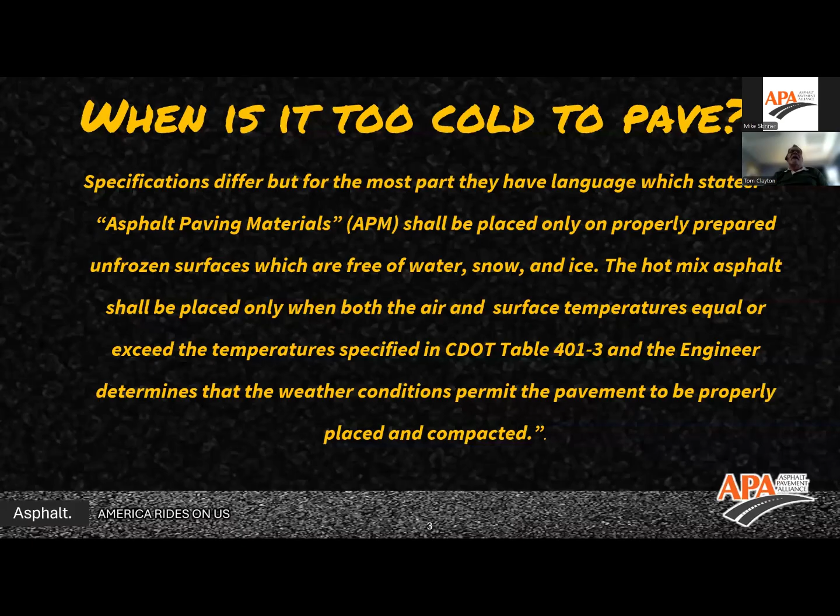Well, those things are definite that we have to have. We know that when we're placing on materials that are not within what we expect, having the proper temperature of the ground, proper temperature of the materials, we could end up with problems that won't show up the first year or second year, but will show up at some point down the line. So we want to make sure we're doing things properly so we can get the material down, get it compacted, and give us that long-lasting pavement that will get years and years of life out of.

So, as Mike said, the temperature is starting to drop. We're seeing people starting to get into a little bit of a panic mode. We had, in the Denver metro area, our first freeze warning overnight. It didn't get real cold, it got down to, I think, 30. So it wasn't a real big deal, but our ground in the metro area is still very warm.

It's probably in the 55 to 60 degree range because we've had a very mild fall. In other parts of the country, I was speaking to our newest employee who is coming to us from Minnesota. He told me about some really cold temperatures they have in mid-state Minnesota and up north toward the Canadian border. So they're already panicking up there.

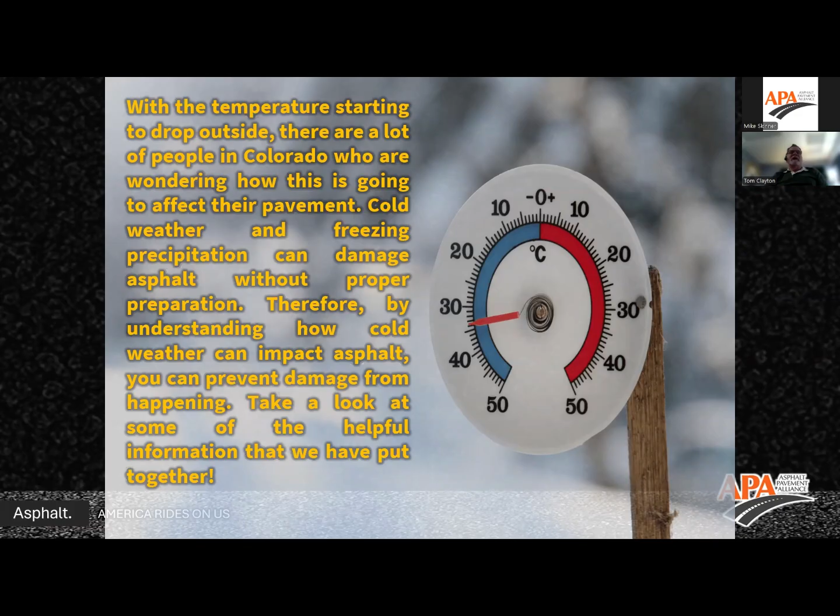So those are things we want to make sure we're looking at. Cold weather, we have to prepare for it. We know it's coming in our climates where we do get the colder weather in the northern half of the United States. We know we have to prepare for it and do the right things. So we're going to talk about some of these things and push through them. And as I go along, if you have questions, pop them into the chat window and we can chat about them as we go along or after.

So what are the considerations for paving in cold temperatures? Well, you can see I've got 3 bullet pointed items there: the ambient and surface temperatures, and then the temperature of the materials being produced. So it's important that we look at all of those.

One of the things I like to do when talking to people about this is I want people to rank those 3 things in importance as we're going along. So as all of you are sitting here looking at this, in your mind or write down, what is the most important? The ambient, surface, or the material being produced? What are the most important temperatures? What's number 2 and what's number 3?

So in my mind, number 1 is the surface temperature. If we have a good surface temperature, like here in the Denver area and the Metro Front Range, where we haven't had really cold temperatures yet, even though we had a very cold overnight and our ambient temperature today is in the mid 40s to upper 40s, there's no reason a contractor shouldn't be able to go out and put down asphalt and do it properly without having problems.

So that surface temperature, if it's too low, starts drawing the heat out of the mat, and the mat compacts. We all know the mat compacts from the bottom up, not from the top down. So it pulls the heat out of the mat, which sets the binder very quickly. So the bottom part of the mat, depending on how cold it is, will affect how much of that binder actually sets so that it will not compact.

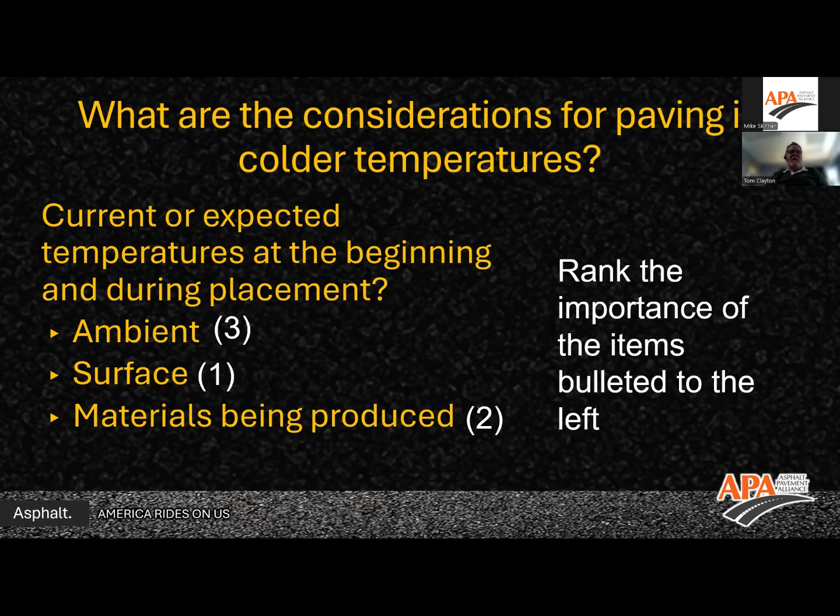In my mind, I told the contractor at that point, you should have just put it down, got your thermometer out, and said look, my thermometer says it's 40 to 42 degrees, whatever it is, we're going, get out of my way. Then prove to them through the process of placement and compaction that you were able to do what you need to do, especially since you had plenty of ground temperature to do it. So those are things we've got to be looking at on a regular basis.

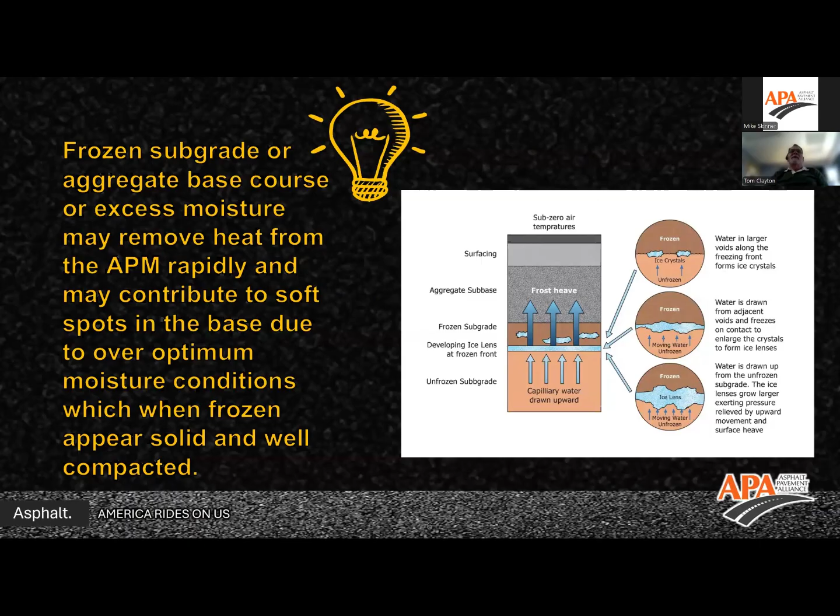So we know that a frozen subgrade base, even doing a top lift on a cold or very cold frozen surface, is going to be a problem. I talked about how it will rapidly pull the heat out of the mat, and it's not a slow process, it will rapidly pull it out. The heat transfer will go from the material being placed into the subgrade base or the existing asphalt layer, and it will draw it out very quickly.

And that will then cool the mat for the compaction process. For compaction purposes, it will deteriorate the life of the mat through those additional years of freeze-thaw. We have to be very careful of how we look at that and what we're going to do.

The thing about a frozen subgrade or frozen base course is you'll drive trucks over it, drive heavy pieces of equipment over it, and it will look very stable and solid, but it may have a high moisture content. When that hot asphalt, 300 degree, 275 degree asphalt gets on it, it will thaw that subgrade very quickly and could turn what would appear to be a very stable base into a very swampy base very quickly, with that heat being drawn out and thawing it down.

Think about an ice cube. An ice cube, when it comes out of the freezer, is very hard, very stiff, but if we leave it sitting out, it becomes a puddle. If we have subgrade that has a high moisture content, or it may have snowed or rained on it and then froze, it looks very good. We have to be very careful about what that is, and make sure we don't have that.

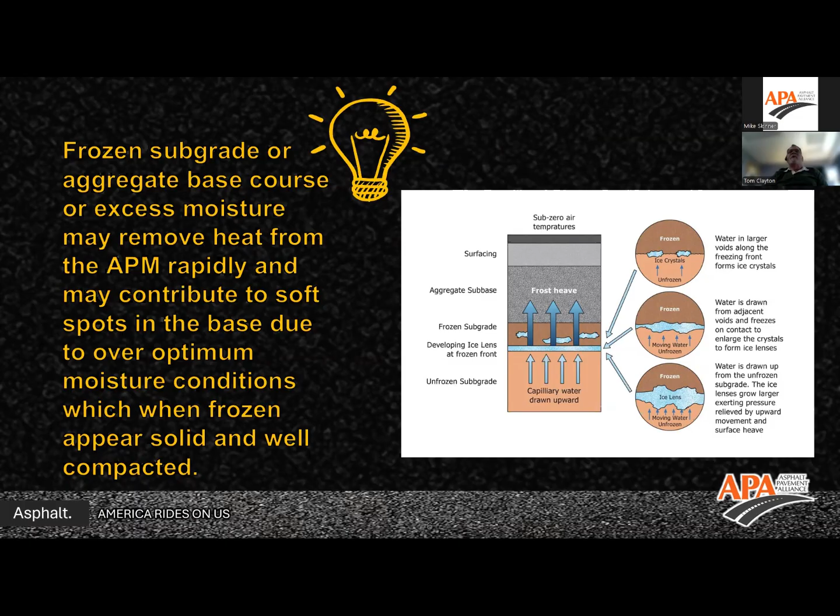How do we check for frost in subgrade? Well, it's not as simple as taking a thermometer. Most of us are using non-contact type thermometers, like an infrared thermometer, taking a shot at the surface and going, oh, it's frozen. That's great, it's going to give you information, but that's not the information you want.

You want to get somebody out there that's going to dig a hole down and try to figure out how deep that frost has penetrated. If there's frost and it's an eighth of an inch, a half an inch, even up to three quarters of an inch of frost, that typically isn't going to be a real detriment to the placement of the asphalt. If you get much deeper than that, an inch or more, you're starting to get into the territory of: wait a minute, we probably ought to rethink what we're doing here and get that frost to come out of the ground.

A little bit of frost on the surface - that's why it's important that the technician on site gets a shovel out and digs down to try and determine the depth of the frost, not just whether it's there. It's very simple to prove that it's there, but now we want to see, okay, it's there, but how much is there?

If it's a minor amount, like this morning here in the Denver metro area with our freeze overnight, we probably had a little bit of frost in the ground, but it was so minor that there was no reason why a contractor couldn't have gotten out this morning and started paving as soon as the sun came up, because we had such a minimal amount of frost overnight. So it's important that we look at that. The other things that are going to be drivers are the current ambient temperature and the wind speed. Wind and cold air will help to create additional frost.

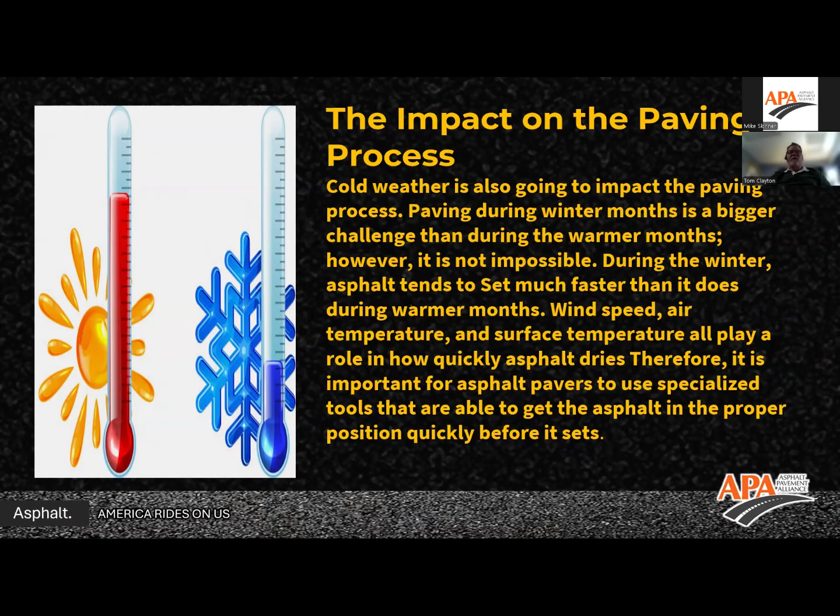So it's very important that in those months we are not just making assumptions, that we make true determinations, and that when we're getting the material down, we know exactly what we're putting it on.

I talked about this a second ago: paving over an existing paved surface. The problem with paving over an existing paved surface is that you have to tack. We put the tack down.

It's somewhere between 160 and 175 degrees coming out of the back of the tack wagon. We spray that down, put it on a cold surface, and it's going to be a heck for it to dehydrate or to break. The process of breaking tack is a dehydration process, the water coming out of it.

It's an emulsified asphalt that has been thinned or cut with water so it can be sprayed out of the tack wagon or tack truck. So we want to make sure that we get that tack to break. Not only does it break, but we want to make sure that it will set as well.

So the first step is to spray it and place it. The second step is for it to break. The third step is for it to set. We can all work on getting an image of that difference between breaking and setting.

Those of us that have been on projects, looking at projects, say once it's broken, okay, it's good to go ahead and pave. We start backing trucks and backing the paver in, and they're picking the tack up because it hasn't completely set. So we want to make sure the tack will set on that cold layer, that cold asphalt or concrete layer you're going to be paving over.

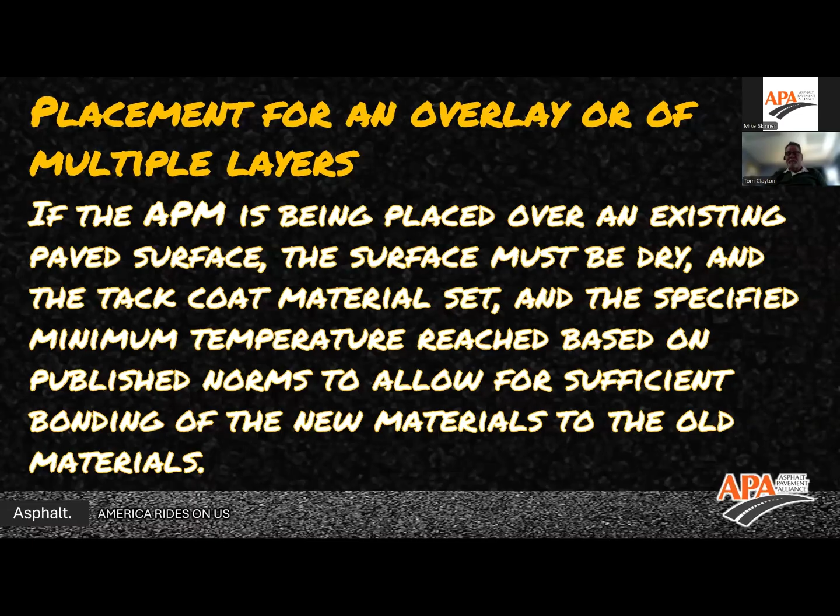You want to make sure that will also set, not just break, but set, so we can get that good bond of materials, the new layer to the old layer.

How do we get the material from the plant to the paver without losing tons of heat out of the material? Well, we know we have to tarp our loads because it's mandatory by law in most states, so that product and particles don't fly out of the back of the truck and hit people, windshields and vehicles following too closely to the delivery trucks.

So we've looked at it, and research has shown us that tarping has very little effect on maintaining the temperature in a truck. Tarps are not, in most cases, insulated. The bed of the truck is not insulated either.

Therefore, we have to do things to help get that material from the plant to the paver and hold and maintain as much heat as possible. So when they put that tarp on it and start driving, it's going to rapidly cool the top layer of that asphalt, so it will seal it up.

That's a problem because now we've got temperature segregation in our material that we have to think about. When it cools that top layer, it seals up the loose voids in the material, and the rest of the material sitting in there acts like a convection oven. We get an oven effect.

Once we get out to the site, we want to make sure we're not getting that temperature segregation in our material. It's important that the cold crust of material be blended back into the hotter material so we get a consistent temperature in that haul truck, whether it be a tandem, super tandem, a trailer, a dump trailer, a flowboy type, conveyor unloader, or a belly dump. We want to reblend that material so we don't have a hot layer and a cold layer, or a hot zone and a cold zone running through it.

So it's important that the trucks be unloaded properly. The best way to unload the trucks is to break the load prior to releasing the load.

What I mean by that is if it's a dump type truck, whether it's a tandem, a super tandem, or a dump trailer, they raise the bed of the truck up without releasing the tailgate. That breaks that load loose, and then it starts that movement again to start regenerating or remixing the material back together. Then they lower the bed of the truck back down.

The truck is then picked up by the paver. The paver runs into the truck, picks the truck up, the bed comes back up, but during this whole time the tailgate is still locked. So the bed is up and the material slides against the tailgate of the truck. Then they get the signal to release the material, and it slides out of the back of the truck into the hopper of the paver in a gob.

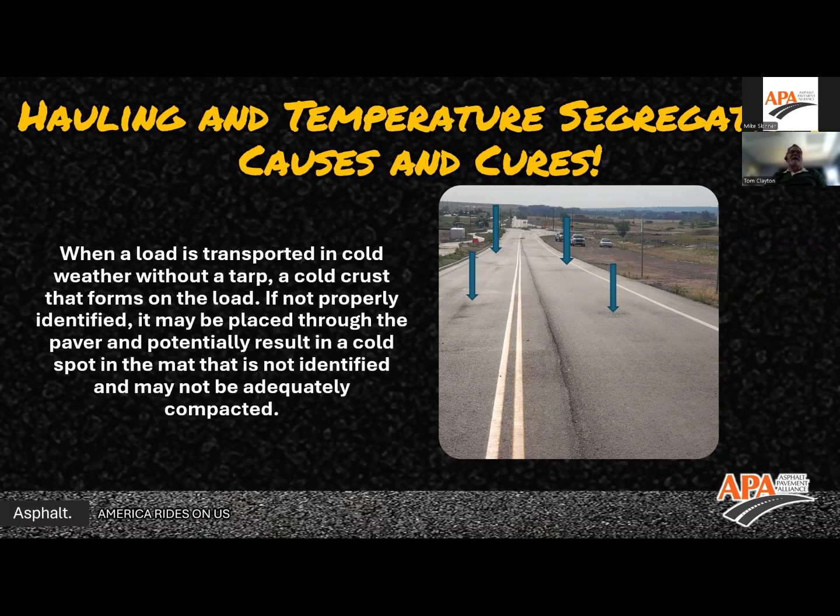You're going to have differential compaction in there, and you'll have to apply a different amount of energy. The problem is that nobody, or most people, don't even realize that, so the roller operators don't change what they're doing. It's important that they're not creating their own problems.

So here's a definition of what we're looking at: temperature segregation is the presence of masses of mix in the mat with temperature differentials that prevent uniform placement and/or compaction. That's what I was showing you in that last picture.

So how do we eliminate that? The first thing is, if they're in dump paving, or even using a conveyor type paver—a Flowboy, Red River, whatever you want to call it—the same thing should occur. Keep the tailgate latched, turn on the belt, get the material moving back when they're picked up by the paver. Then they release the gate and the material comes out in a gob back into the paver.

We want to try and remix as much as we can. The other way we can do that is with the belly dump—we get the remixing because the material comes out of the belly of the truck, picked up by some type of pickup device, whether hooked to the paver or on a transfer vehicle such as the shuttle buggy or the Weiler transfer machine. Then you have a remix there, so we can keep that temperature segregation to a minimum.

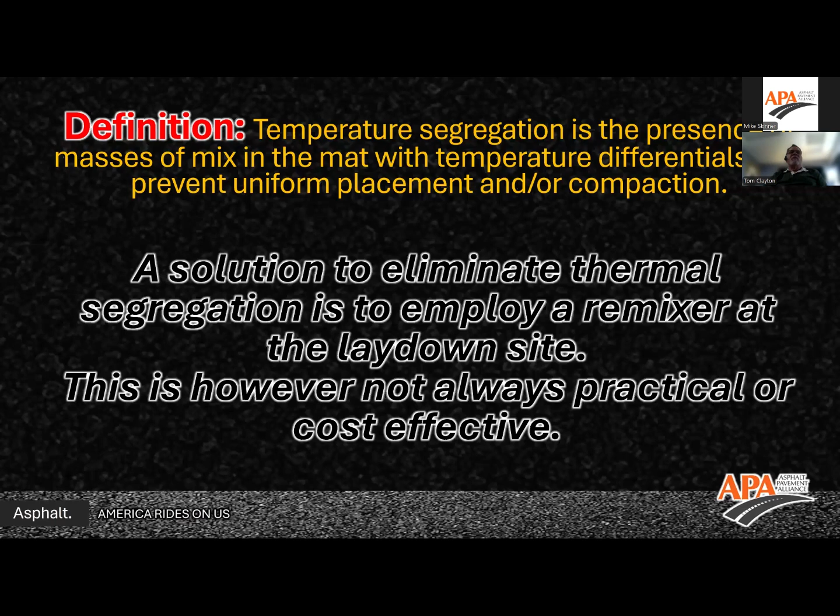So we want to make sure we do that. There's another way we can work to ensure our materials go down without having to be highly concerned about temperatures, and that's using additives. The additives we can use are chemical additives, organic additives, or water molecules, and they all work in a similar manner.

Some people like the organics better than the chemicals, some like the water spray better than the organics or chemicals. It's a preference—there's not a hard and fast rule of what is better. We call those here in Colorado, and most places across the country call it WMA, or warm mix asphalt.

We have backed away from that term. We call it a workability mix additive. Because in my opinion, and through what I've been pushing for the last 25 years, 275 degrees is still pretty warm. What we hear people saying is, oh, we're going to turn the plant down to 275, put a WMA in it. Well, 275 to me is still pretty warm. I don't want to grab anything that's 275 degrees. So it's still pretty hot.

But what those additives do, whether they be the chemical, organic, or water additives, is make the material much more workable at lower temperatures. So we can turn the temperature down and make the material still workable, or more workable, even at lower temperatures. There are lots of manufacturers of these products. I would tell you that one is better than the other, but I can't do that because they're all very good materials, and they're all out there to help.

So WMA in 2025, we know that we're using it. I can go around the horn here: placement in colder temperatures. We hear a lot this time of year that producers are saying, oh, we're going to put an additive in. But I know there are producers in Colorado that are putting WMA in their mixes all the time, because they get the advantage of it. Even in warmer temperatures, they're getting an advantage—they can get it compacted faster.

We know that it'll extend the workability. I have been on projects where they have actually worked material down to 110 to 120 degrees without causing any damage to the mat during the compaction process.

The best explanation I've been given by any of the really smart people in the WMA world is that the WMA, as long as it's being worked, will remain active. But if you get off of it for any period of time—and the colder it is, the faster that period of time is; in the summer months it's not as fast—as soon as you do that, the product becomes basically inert. It just kind of sits there. It's not workable, it's not usable.

We're using production in lower temperatures—a cold day, a 40-degree day or a 50-degree day. Putting the WMA in there is just going to help with our production. I'm going to jump across here to the other side, and it's a compaction aid.

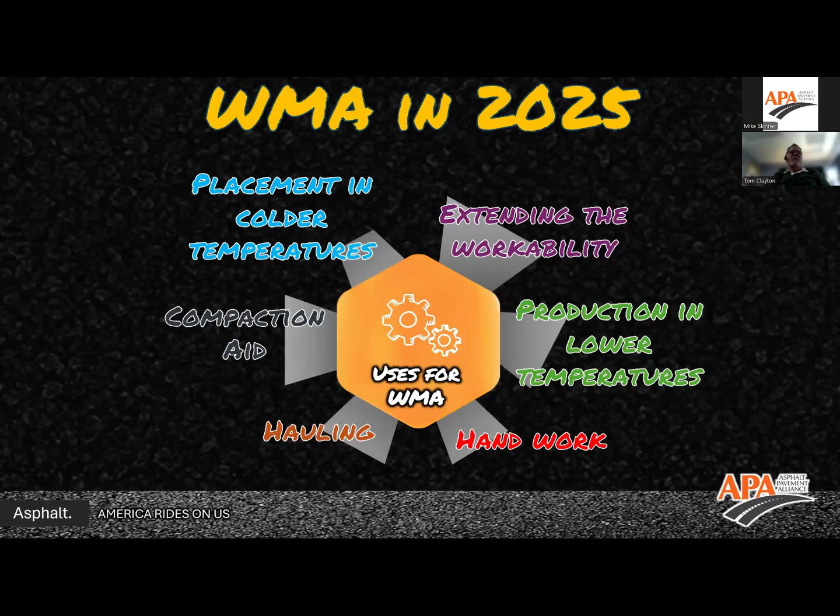So these are all the uses for WMA. You can see—and there are probably more that I haven't put on here—but these are the six spokes that I know of that are very beneficial to WMA.

There are a couple of different programs out there that can help with the placement of the asphalt. It's not a hard and fast rule, but it gives a kind of guideline. This one is called Pave Cool, and you can see the link for it—it's dot.state.mn, which is Minnesota. You can go on and download the app, and you put in your data: the air temperature, the wind speed, what is it—clear and dry, cold and dry, whatever it happens to be. You put your latitude and longitude in there, and it will give you a curve. This curve shows the time to compact. So you started out with a 260, 270 degree material.

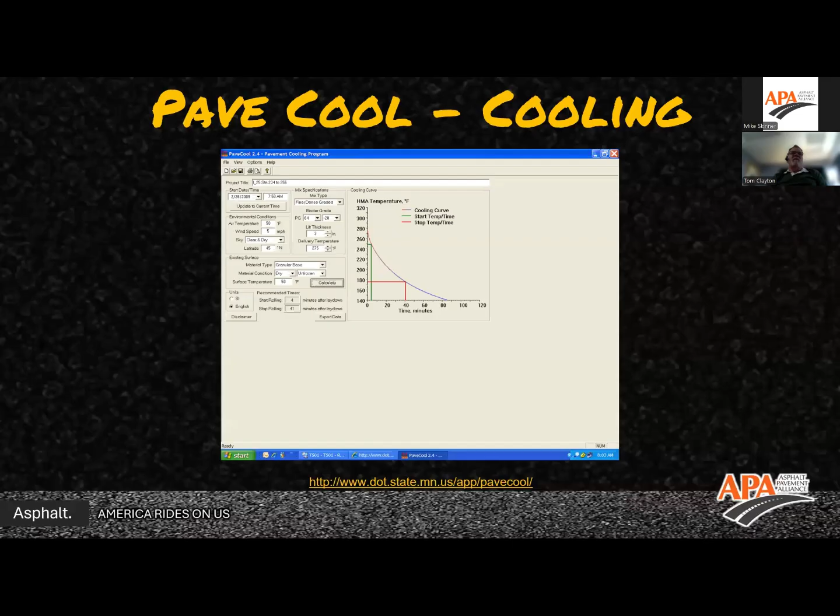Your time to compact could be 80 minutes, 60 minutes, or 40 minutes, but this is the zone where you've got to be. You're down to 180 degrees, you've got 40 minutes to get to 180 degrees. So it's just a chart, a graph that will give you some comfort.

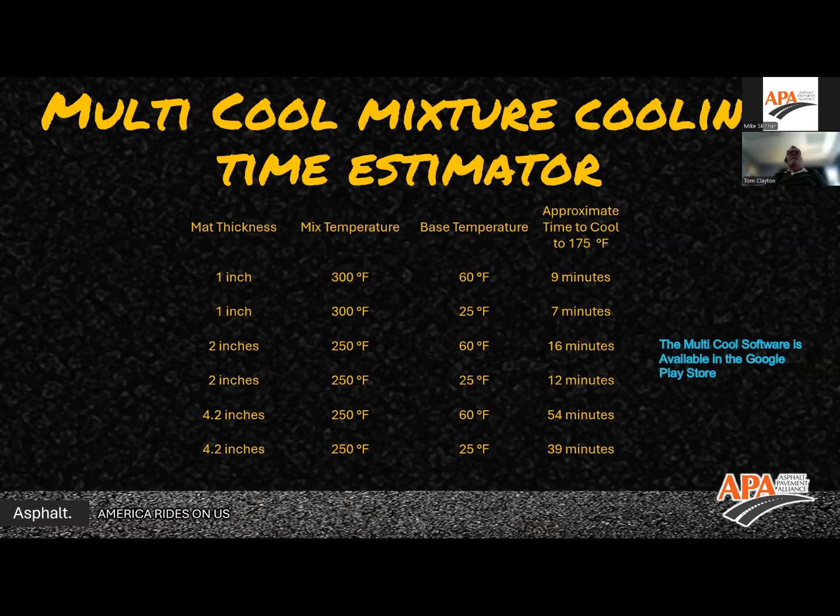There's another tool out there called Multicool. It's an app you can put on your cell phone, available from the Google Play Store. It does basically the same thing as Pave Cool, virtually the same. It gives you an estimate that if you're paving 1 inch, 2 inches, or 4.2 inches, what your mix temperature is, what your base temperature is, and how long you have for all 3 phases — breakdown, intermediate, and finish rolling — to get the material done. Those are tools available to us to get better results by paying attention to them.

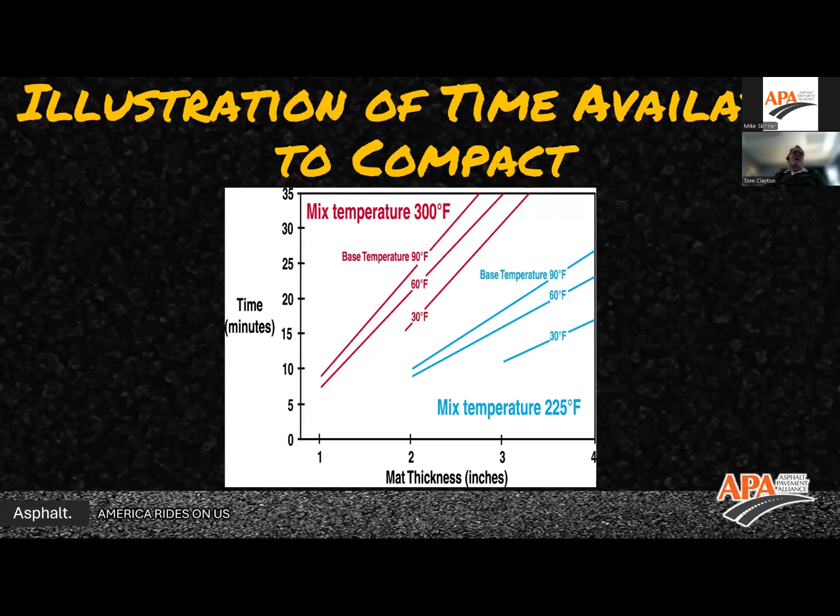2-inch mat — we're going to be up there. So those are things we've got to look at. We have to make sure we're paying attention to our temperatures, the mix temperature and the ground temperature. Those are the two things we've got to look at.

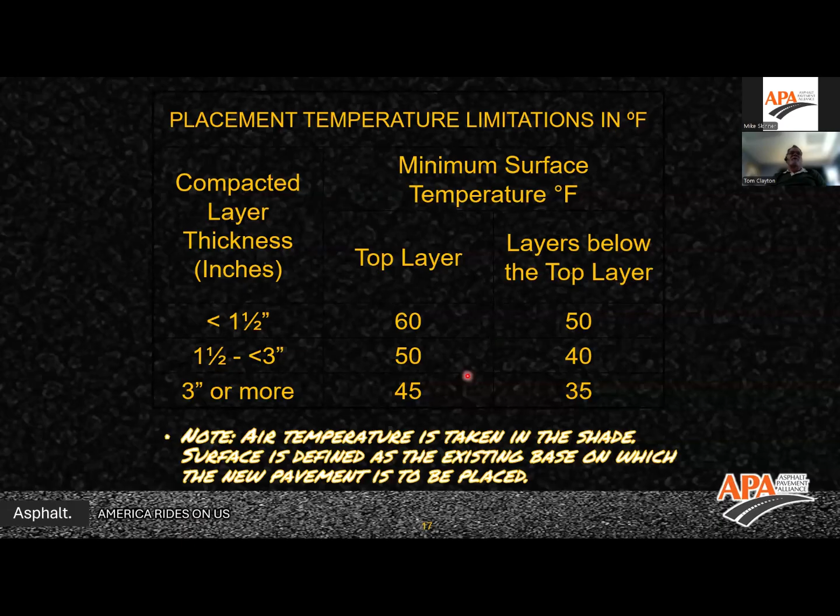So we want to make sure we're taking our temperatures in the appropriate place. Again, ambient temperature should be a guide, not a hard and fast rule. This is what we should be looking at for ground temperatures or surface temperatures — this is where we should be living, that's the world we should be living in.

So we know that mix temperatures are influential factors on the time available to compact. That chart I showed you two slides earlier is a great indication of that. So the obvious solution is, and I talked about this a minute ago, we'll just turn the heat up. Well, how much can the temperature go up, and how much does it cost? And I don't mean in dollars, but there is a dollar value to it.

But what does it cost in damage to the mat, damage to the material going down, and the life of the material? If we turn the temperature up just to get the compaction today, but we lose 5 years of life, was that worth it? If we lose 7 to 10 years of life, was that worth it? So those are things we have to look at.

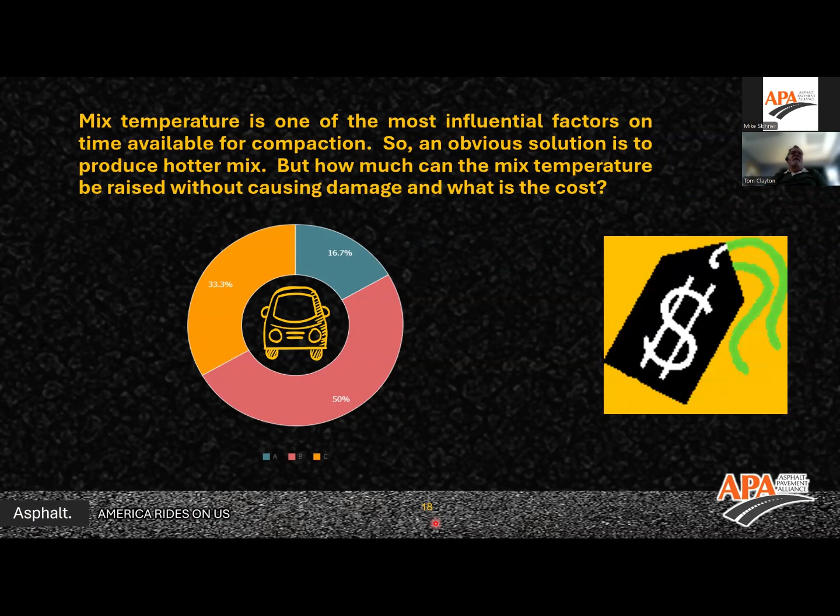So we have to be very careful about what we're doing and what we're causing simply by turning the temperature up. The other thing we can do instead of that: the NAPA QIP 118, which is a cold weather compaction document, downloadable off of NAPA's website, says that it's probably okay to turn the temperature up 18 degrees above the recommended temperature.

That comes from data gleaned out of the Asphalt Institute, where they did research that said we could make this oil hotter without really losing a lot of the light ends in it or causing damage to the binder. We have since found out that isn't necessarily true. We're seeing more and more now that if you raise those temperatures with our blended binders, especially the highly blended binders, we have created a monster that we don't want.

I wouldn't typically recommend turning the temperature up at all. If they're saying 290 degrees is the proper temperature for a particular binder, say a 64 minus 22 binder, the maximum heating temperature is 290. That should be the maximum heating temperature. We should do other things to help us on the backside, like adding WMA in. It's going to cost less dollars to put the WMA in than to lose years and years of life in the mix.

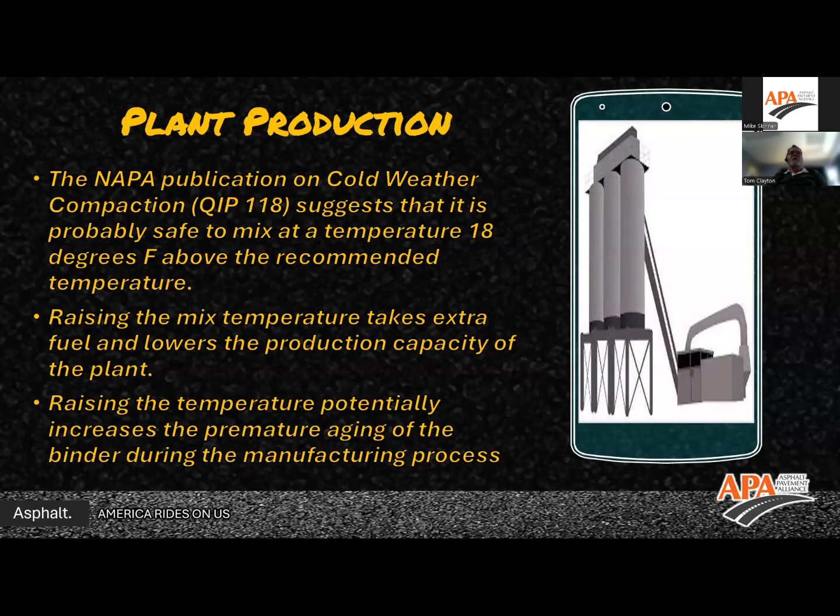So raising the temperature is going to potentially increase premature aging. We want to make sure we're doing the right thing to give us the best chance for long-term success. So we have to look at what the goals of compaction are. The goal of compaction is to get the material compacted with little or no damage at the normal compaction temperatures, generally 175 to 275, about a 100-degree swing from the time it goes down to the time we should be off of it. The finish roller should be done around 175. With lower temperatures, things are going to vary a little bit.

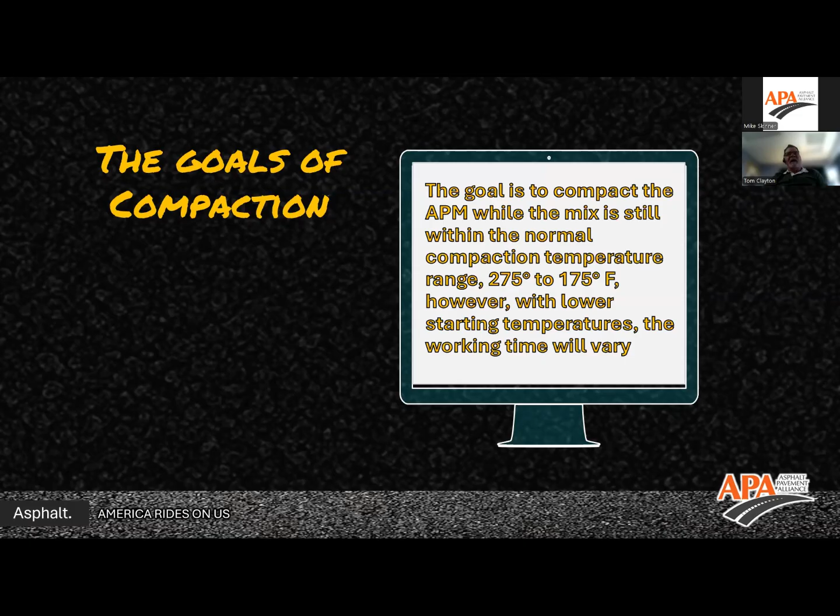If you've got WMA in there, that 175 might be 155, might be 140, who knows. But we have to make sure we're not doing things that deteriorate the life of the pavement simply because it's cold. If it's too cold, why are we paving? So normal production temperatures, compaction should be finished between 160 and 180. If WMA is added, that temperature can be adjusted.

My rule of thumb here would be that the inspectors and testing technicians be keenly aware of the condition of the mat while the compactive effort is being applied. The introduction of fine cracking, or what some people call fissure cracks, would be an indication that the binder is setting up. If we start seeing those little cracks—the roller goes one direction and you see fine cracks across the mat under the footprint of the roller—that's an indication the binder has started to reach its set point, going from liquid to solid.

If they come back the other direction and those cracks seal back up, that's generally not a problem. But if they come back the other direction and those cracks do not seal back up, that means we have probably reached the temperature at which they should be off the mat, so as not to create additional problems through the compaction process.

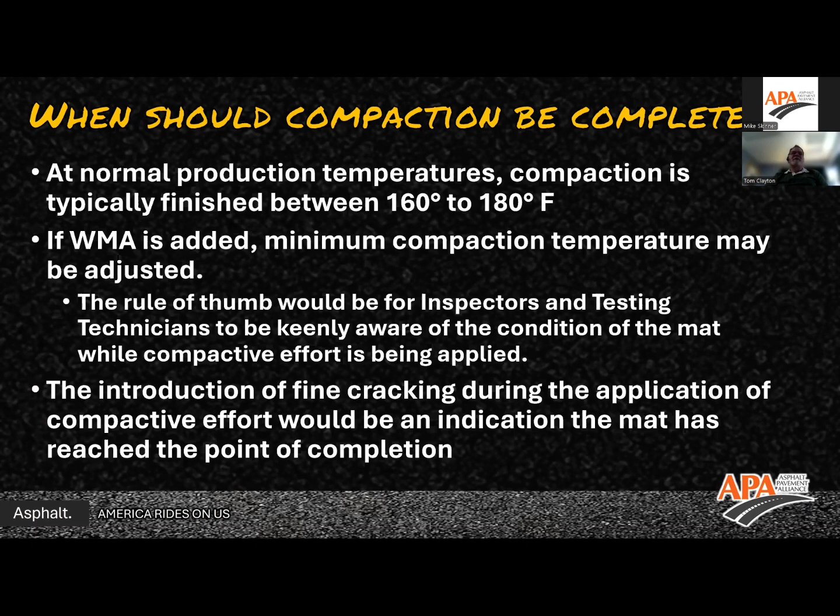The things that have to be very aware of is making sure that through our compaction process, we are not causing damage that is going to lessen the life cycle of the material.

The question gets asked all the time: should we use more equipment? The simple answer is sure. But the reality is most paving spreads, you don't just get extra equipment today. That's just not the way it works. So if we have more rollers or higher capacity rollers, that's simply going to help.

One of the keys here is when the material's coming out of the back of the paver, the breakdown roller needs to be operating as close to the paver as possible to seal the mat, close those open and interconnected voids, and hold as much heat as possible. If they wait too long, they allow the heat to escape from the mat through the open interconnected voids, then we're going to lose compaction time and have more of a fight on the back end, especially when we're getting down to the finish roller.

And I just talked about the fine cracking that would go along through the finish rolling process. If we have that going on, it's just a matter of changing the process, keeping the roller closer to the paver, sealing that mat up, which means the intermediate roller has to be kept closer and the finish roller has to be kept closer so we can work it while we still have the temperature, and we're not letting the temperature run out of the mat or being driven out of the mat. We want to make sure we keep the temperature in the mat as long as possible.

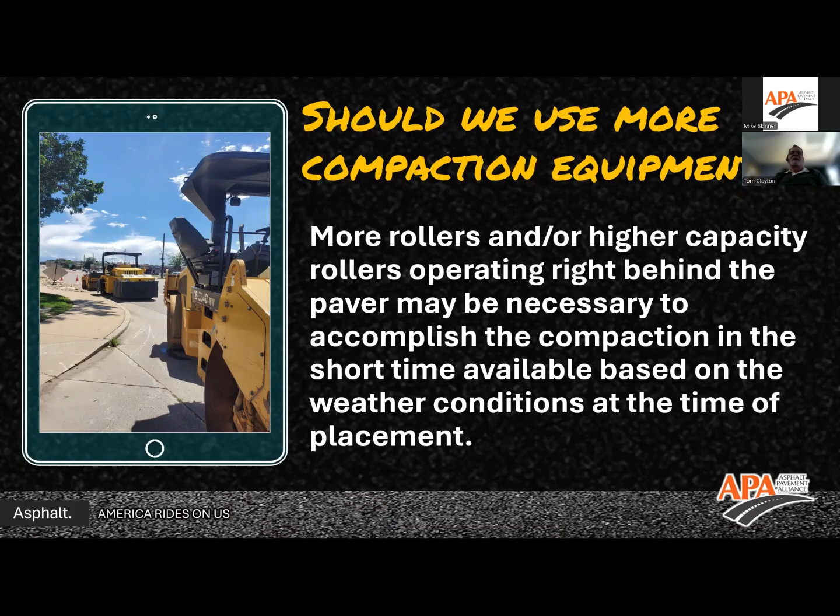Can we increase the layer thickness? Like I said a minute ago, the layer thickness is what the layer thickness is. If it's specified as a 2-inch mat, then it's a 2-inch mat. They don't generally have the ability to go, well, we are not going to do 3 now. That's just not the reality.

Minimize the time or length of the haul. The only thing we can do is space the trucks so they are not sitting on site. The plant is where the plant is. The haul distance is what the haul distance is. That is a given, we cannot adjust that typically. We can't just pick up the plant and move it. We can't pick up the project and move it closer to the plant. Those two things don't happen.

So what we have to do is change what we're doing. We don't want to have 5 trucks sitting in front of the paver. We want to have one at the paver, one in front of that, and everybody else in motion. If we get 5 trucks in front of the paver, that's where we start causing problems.

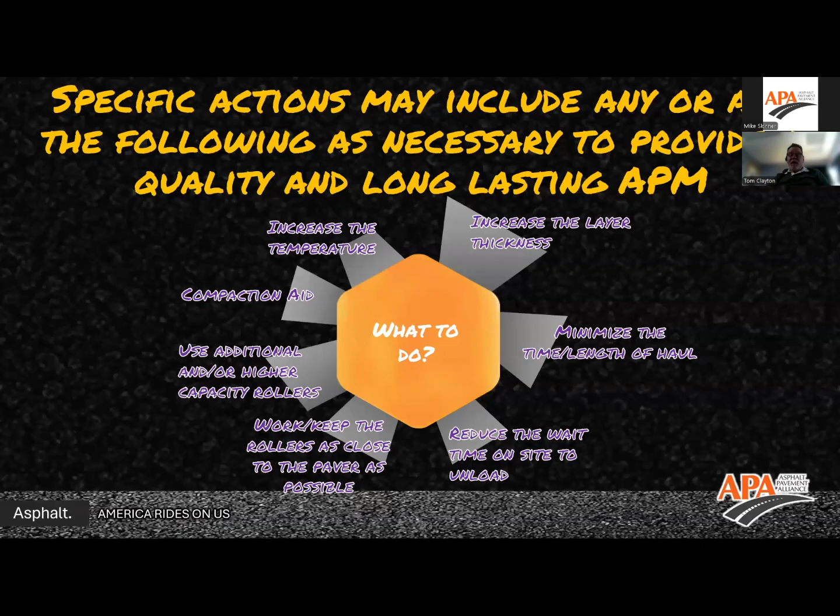We can simply put in a compaction aid, put in a WMA to help us with compaction. Using additional or higher capacity rollers, we go from a 10-ton to a 12-ton, a 5-ton to a 10-ton, we get that done. We keep the rollers as close to the paver as possible. And then these two go together: minimizing the haul, but really reducing the wait time while they're ready to unload. Those are the things we can do to help create a quality and long-lasting asphalt paving material.

I didn't explain that. A lot of people around the world are still calling it hot mix asphalt, hot mix asphalt, hot mix asphalt. We have renamed or re-acronymed asphalt paving material because we don't know whether it's a material that's an SMA, an open graded friction course, a WMA, has a WMA in it, or a porous asphalt. We just simply call anything that's hot, black, and sticky APM, or asphalt paving material, so this applies to everything we're doing.

So is it worth the extra cost to place APM in cold weather? This statement right here is probably the real driver. Ultimately, only the person paying the bill can answer that question.

There will be a lot of times when owners get pressured to get an asphalt parking lot done this time of year so they can work through the winter, or because they know they're going to close a building or need something opened back up in December. So they have to get it done, have to get it done. Well, the answer to that is, how bad does the owner want it?

If the decision is made to place it in the cooler temperatures, it's going to cost a lot less to do it the right way the first time than to have to go back and remove and replace. I've talked about that several times during this hour - we want to make sure that we meet or exceed the anticipated life cycle for that pavement. If it's not done right the first time and we have to remove or replace, that means we probably have not met our initial life cycle analysis or prediction.

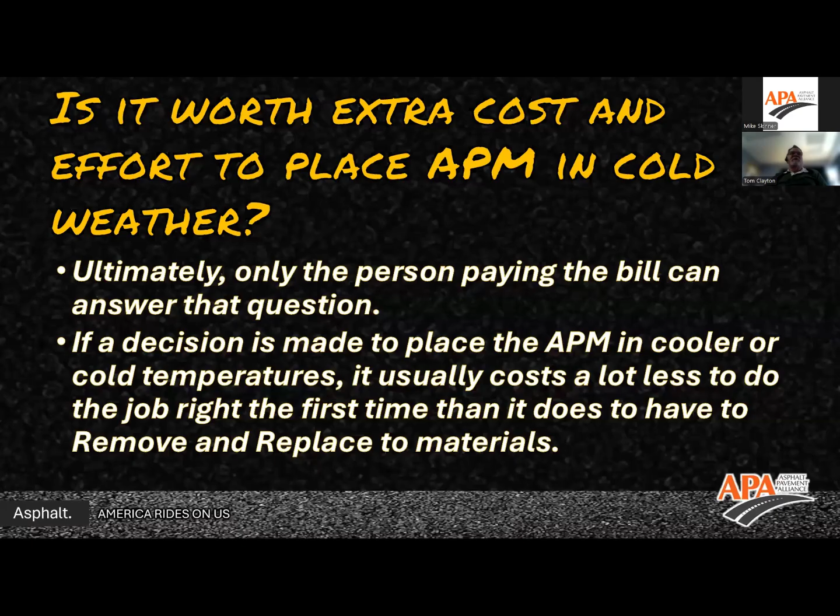I've been on projects where they get a subgrade prep done on a whole residential street, maybe 500 to 1,000 feet long, prepared in the afternoon while the sun's still out, and then they lay insulated blankets over the top of it. The next morning they come back, pick the blankets up so they can pave it that day. But that goes back to cost, and ultimately only the person paying the bill can answer that question: is it worth it? Do you need it paved that bad? We can do these things to continue working, but it's going to cost you money.

So with that, I'm a little bit ahead - I got through that in about 50 minutes instead of the full hour. But if there are any questions, Mike, I would hope we had hundreds of questions while that was going on. I'd be happy to answer those at this time.